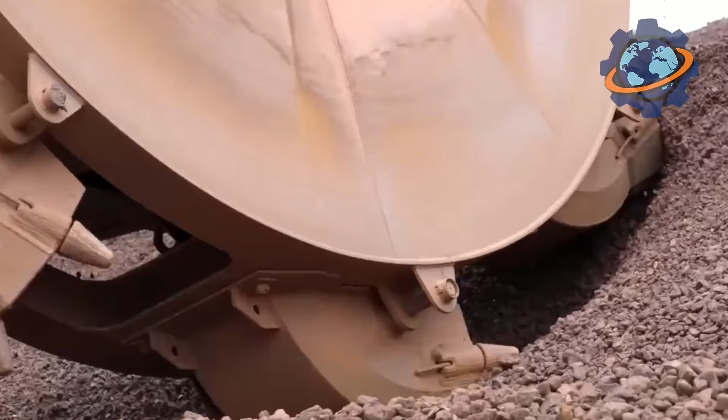Every year, humanity extracts over 2 billion tons of iron ore from Earth's crust. Picture this. More than half of our planet's entire weight is iron, most locked in the core, creating the magnetic field protecting all life. But here's what shocks engineers worldwide. We're standing on the most abundant metal in the universe, yet accessing it requires temperatures hotter than volcanic lava.

How does rust-colored rock transform into gleaming steel skyscrapers? How do ancient mountains become modern civilization? Stick around till the end. You'll discover why iron shaped human history more than gold ever did, and the jaw-dropping secret hiding inside every bridge, car, and building around you right now.

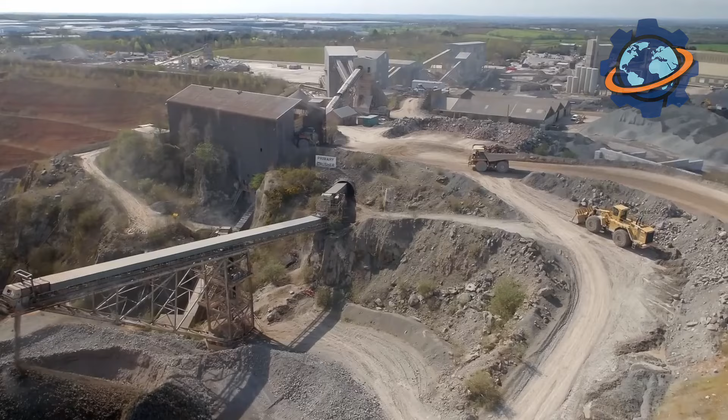The story begins in Western Australia's Pilbara region, where iron mountains stretch across landscapes older than dinosaurs. Massive excavators, standing 8 stories tall, picture buildings that walk, tear into rust-red cliffs with bucket teeth weighing 12 tons each. These mechanical giants rip through rock layers formed 3 billion years ago when Earth's oceans first rusted.

With thunderous crashes echoing across 4-mile-wide craters, each excavator loads haul trucks carrying 400 tons per trip. That's the weight of 80 elephants moving at 40 miles per hour on tires taller than basketball hoops. Processing 30 million tons annually from single mines, enough iron ore to build 12 Golden Gate bridges every single day.

Next comes crushing, where house-sized jaw crushers, imagine dinosaur mouths made of hardened steel, pulverize boulders into gravel-sized chunks. With deafening roars splitting eardrums even through protection, these crushers generate forces exceeding 20,000 pounds per square inch. Clouds of red dust billowing upward create artificial sunsets visible from space satellites.

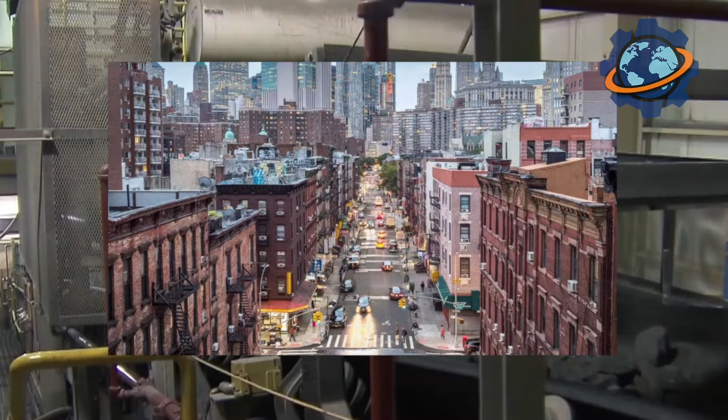Conveyor belts stretching 12 miles long, longer than Manhattan, transport crushed ore at 18 miles per hour. Workers riding inspection carts traverse distances requiring 25 minutes one way. That's enough belt to wrap around 300 football fields. Every hour, 50,000 tons flow through this system, weight equivalent to 5 Eiffel Towers moving continuously past checkpoints.

Giant grinding mills, standing 5 stories tall, with diameters matching Olympic swimming pool widths, pulverize rock into fine powder. Inside these rotating drums, 20-ton steel balls, each weighing more than shipping containers, tumble with ore, creating grinding thunder heard miles away. Operators monitor vibrations. Wrong frequencies mean catastrophic bearing failures, costing millions.

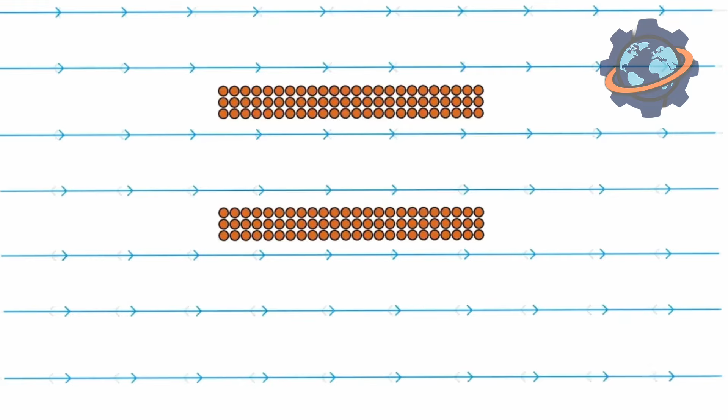At rotation speeds creating gravitational forces triple normal Earth gravity, particles shrink to powder finer than talcum. Processing 8,000 tons hourly, that's filling semi-truck after semi-truck every 30 seconds. This powder, called concentrate, contains 65% iron. Magnetic separators then extract iron particles using forces strong enough to levitate railroad spikes, leaving waste rock behind.

Next comes the blast furnace, a towering inferno standing 30 stories high, its steel shell glowing dull orange even from outside. At internal temperatures exceeding 3,000 degrees Fahrenheit, hot enough to vaporize aluminum instantly, iron ore transforms into liquid metal. Picture Dante's Inferno engineered with precision.

Measured charges of iron ore, coke, and limestone descend from the top, while superheated air blasts upward at 2,000 degrees from ring-shaped nozzles called tuyeres. This creates a raging chemical storm, where carbon monoxide rips oxygen from iron oxide molecules. The reaction releases enough heat to melt granite. Every 3 minutes, sensors check 20 different parameters. Without precision, furnaces explode with force demolishing city blocks.

The blast furnace operates continuously for 15 years, never cooling, never stopping, like Earth's core relocated to industrial facilities. Inside this chemical reactor, materials descend through distinct zones. Upper regions preheat incoming ore. Middle zones drive off moisture and carbon dioxide. Lower depths become hell itself, where iron liquefies.

At the hearth bottom, molten iron collects at 2,800 degrees Fahrenheit, dense as lead but flowing like water. Every 4 hours, workers drill through clay-plugged tap holes. Liquid iron erupts in blinding white rivers, flowing through ceramic channels into railroad cars holding 300 tons each. This step is critical because timing determines metal purity. Tap too early, slag contaminates. Too late, furnace pressure ruptures containment walls.

After tapping, slag, lighter impurities floating atop molten iron, gets diverted into separate channels. This glowing amber liquid, essentially liquefied rock, contains calcium, silicon, and aluminum oxides stripped from ore. Rather than waste, it becomes roadbed material and cement ingredient, recycled at 98% rates globally. The molten iron, called pig iron, contains 4% carbon, too brittle for construction. Picture glass that looks metallic. Drop pig iron from waist height, it shatters into fragments.

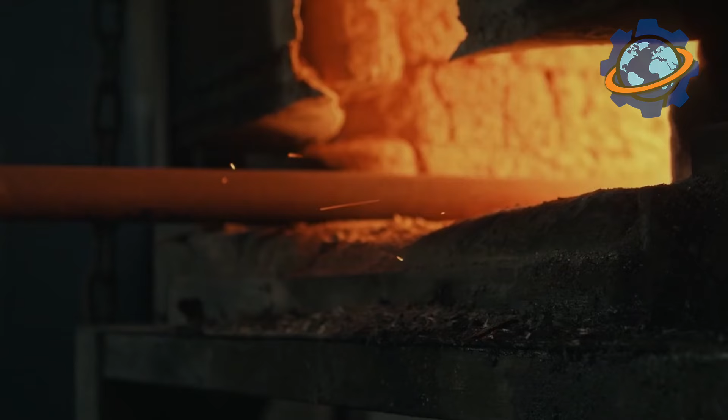Next comes the basic oxygen furnace, where pure oxygen blasted at supersonic speeds through 3-foot diameter lances burns away excess carbon in 17 minutes. Flames shooting 70 feet high, temperatures hitting 3,200 degrees, create hurricane-force winds inside steel vessels holding 350 tons of liquid metal.

Steelmaking requires precision rivaling brain surgery. Computer-controlled oxygen flow adjusts by milliseconds. Operators add exact amounts of manganese, silicon, chromium, elements changing steel properties dramatically. Too much carbon, steel cracks in winter cold. Too little, metal bends under load.

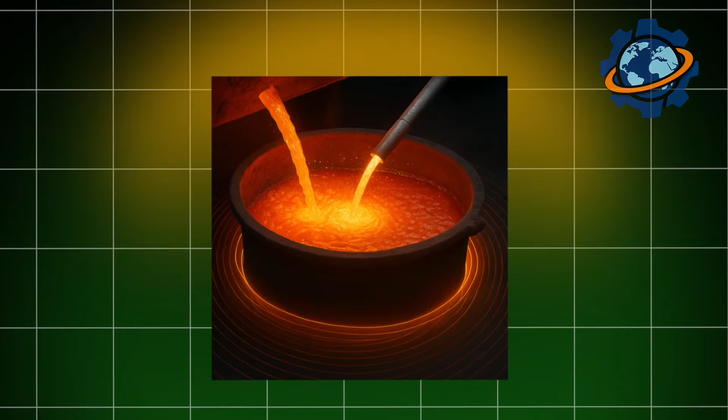Picture this: alloying elements get injected via submerged lances. Electromagnetic stirring, invisible but powerful, homogenizes composition. Samples extracted every 3 minutes get analyzed via spectrometers, determining chemistry within seconds. Modern furnaces achieve carbon content accuracy to 0.01%, the difference between a skyscraper standing or collapsing.

After refining, liquid steel flows into continuous casting machines producing slabs 30 feet long, weighing 25 tons, at rates of 1 slab every 90 seconds. This wasn't always so advanced. Back in ancient Anatolia around 1300 BC, Hittite metallurgists discovered heating iron ore with charcoal produced workable metal. That breakthrough, accidental furnace conditions reaching iron's melting point, changed human civilization forever. Iron tools outperformed bronze, enabling an agriculture revolution.

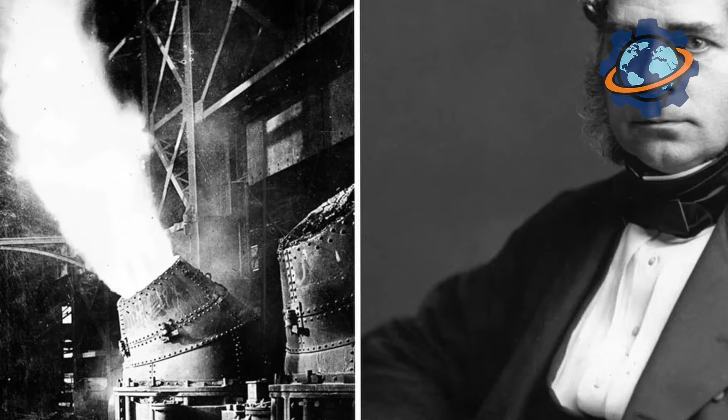The breakthrough came when British inventor Henry Bessemer patented his converter in 1856, slashing steel production time from 24 hours to 17 minutes. Suddenly, steel costs dropped 90%. This single invention built modern cities. Skyscrapers, bridges, railroads exploded across continents. Today, global steel production exceeds 1.9 billion tons annually. That's enough to build 75,000 Eiffel Towers yearly, or manufacture 43 million automobiles, or construct bridges connecting every coastline on Earth.

Carbon emissions drop by 62% when using recycled steel versus virgin ore, equivalent to removing 12 million cars annually. Industry saves over $80 billion yearly through scrap recycling. Processing costs drop 43% because melting scrap requires 1/3 the energy of blast furnaces. So here's the secret promised: every ton of steel you see, bridges, buildings, cars, will be recycled indefinitely. Unlike plastic decomposing into microparticles or paper pulping into mush, steel never degrades.

Magnetic separation extracts it perfectly from demolished structures. That girder in your office building might contain steel from 1930s locomotives. Your car's frame could include battleship armor from World War II. Nothing disappears. Metal merely transforms, reborn eternally. From ancient mountains to modern marvels, the cycle completes. Iron, humanity's most essential metal, circulates through civilization like blood through veins. We're not consuming Earth's iron, we're borrowing it, briefly, before passing it forward to futures we'll never see.

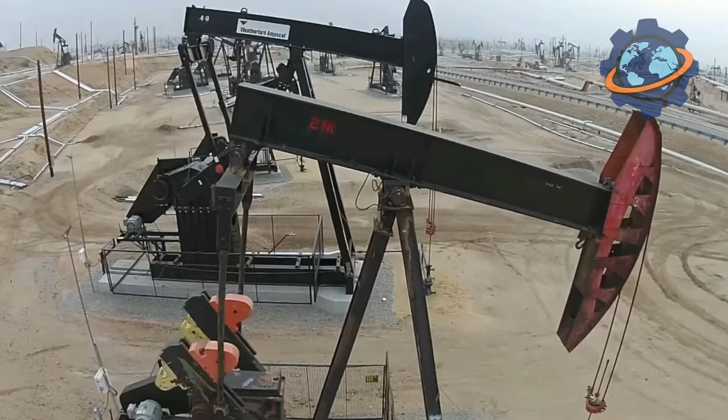The largest gasoline production plant in the United States is Marathon Petroleum's facility in Galveston Bay, Texas. It's a true giant, processing 631,000 barrels of crude oil every day. That's about 26.5 million gallons every single day, a staggering number. Let's dive into the atmosphere of oil refining production.

It all began long before the era of hybrids, electric cars, and climate summits. Back in the days when America was still smoking and roaring, the world needed fuel, and Texas provided it by the spoonful. On the coast of the Gulf of Mexico, in Texas City, a decision was made back in 1931 to build a plant that would refine oil into liquids that make cars and airplanes roar. By 1933, the plant was operational. At that time, it belonged to Republic Oil, and a little later, it was taken over by Amoco, which eventually became part of British Petroleum.

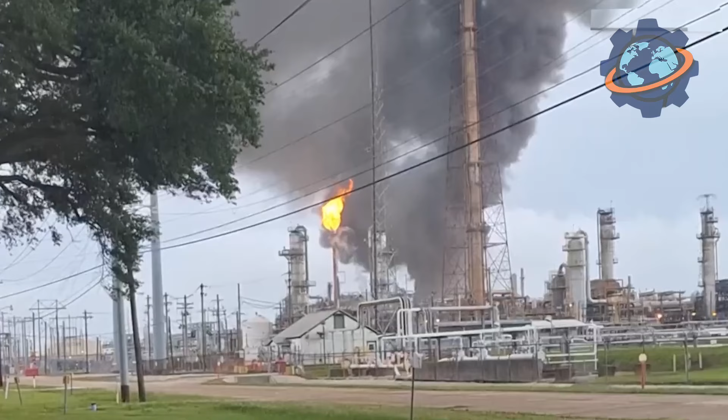And so, in 2013, the giant changes hands. Marathon Petroleum Corporation buys the plant. And they don't just buy it, they integrate it with their own refinery located nearby. Thus, a single gigantic system is born, the Galveston Bay Refinery, which since then has been processing over 630,000 barrels of crude oil every day. To imagine the scale, that's over 26 million gallons of fuel per day, and the complex covers nearly 1,000 acres. Over 1,500 people work there, not counting contractors and specialists who service the units.

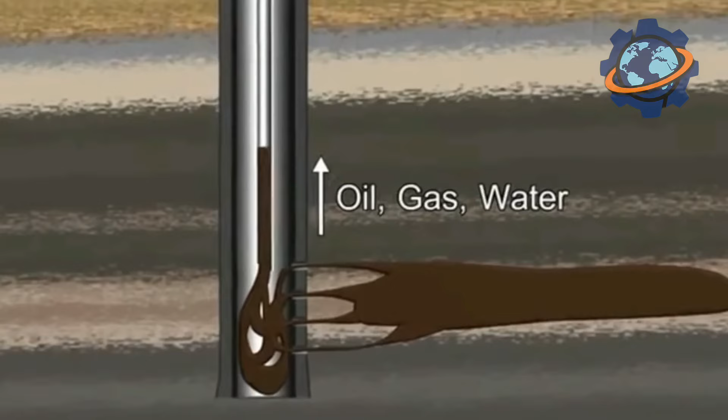It's like a small industrial city, only instead of coffee shops, there are reactors, instead of fountains, cooling towers, and instead of a park, thousands of pipelines. Galveston Bay is the pulse of the US fuel infrastructure. It operates 24 hours a day, 7 days a week, without stops or breaks. It's not just gasoline that's born here, they also produce jet fuel, diesel, fuel oil, petroleum coke, and even propylene for the chemical industry. Everything that can flow, burn, and work is squeezed out of every drop of crude oil.

Interestingly, the plant's location is strategic. The nearby port allows for receiving tankers from all over the world and a network of pipelines and railways for sending products all over America. Roughly speaking, if you're filling up your tank somewhere in the US, there's a chance that at least a drop of that fuel passed through the furnaces of Galveston Bay.

And although the world is changing today, and green energy is being talked about from every microphone, the Galveston Bay Refinery is not giving up its position. Marathon Petroleum is investing hundreds of millions of dollars in modernization, filtration, and reducing harmful emissions. Because as long as the planet is still roaring with engines, this Texas giant remains at the heart of the American highway.

We are heading to a territory where it doesn't smell of flowers, but where pipes roar, signal lights flash, and black gold is turned into gasoline. Galveston Bay Refinery, one of the largest plants in the US, and production there begins not with the push of a start button, but with thousands of miles of logistics, pressure, and thermal alchemy.

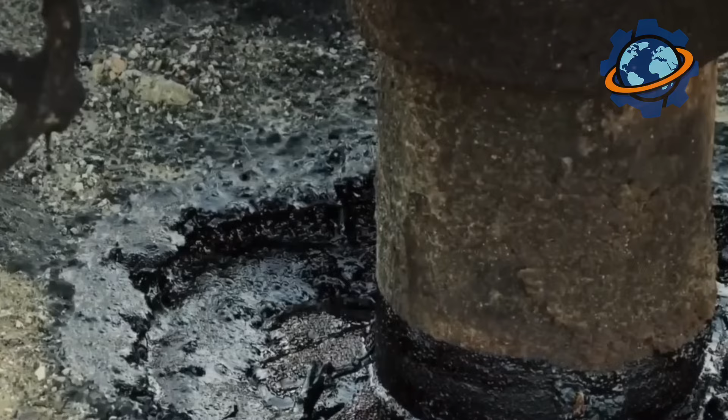The first drop of oil in this story doesn't yet have the smell of gasoline. It's in its raw form, viscous, dark, with impurities, water, sulfur, and metals. It's delivered by tankers through the port of Texas City, or pumped through pipelines that stretch for thousands of kilometers. This plant can receive over 1 million barrels of crude oil per day.

That's an insane amount. The oil goes into huge tanks, so-called crude tanks. Each such tank can hold 500,000 barrels. Imagine that, that's more than 20 million gallons. Here it is stored for several days, where it settles and is heated to a temperature of about 140 degrees Fahrenheit to reduce viscosity and facilitate pumping.

Next, the oil goes through desalters. These are special units that remove water, salts, and mechanical impurities. Because salts are death to metal reactors, they cause corrosion and form dangerous deposits. Here, the oil is mixed with fresh water and electrical energy, creating an emulsion that forces the impurities to separate. This is, essentially, industrial cleaning.

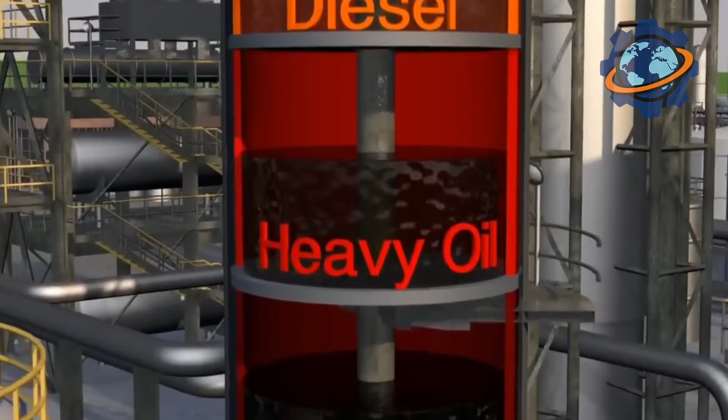After this, the main stage, the atmospheric distillation unit. A tower 230 feet high, where oil heated to 650 degrees Fahrenheit is fed in, and vapors rise to the top. And here the magic begins. Heavy fractions like diesel, kerosene, and fuel oil settle at the bottom, while lighter ones, the gasoline fraction, naphtha for petrochemicals, rise to the top. You can imagine this tower as an oil elevator, where each floor is a separate product.

The temperature in the column plays a key role. At each height, its own condensation point. Heavy components stop faster, light ones fly further. All this works in real time with control over every degree and every drop. But no, this isn't gasoline yet. What has been collected are raw fractions that are then sent to other units. Vacuum distillation, catalytic cracking, hydrotreating, and only then to blending. That is, mixing to meet the standards for gasoline, diesel, and jet fuel.

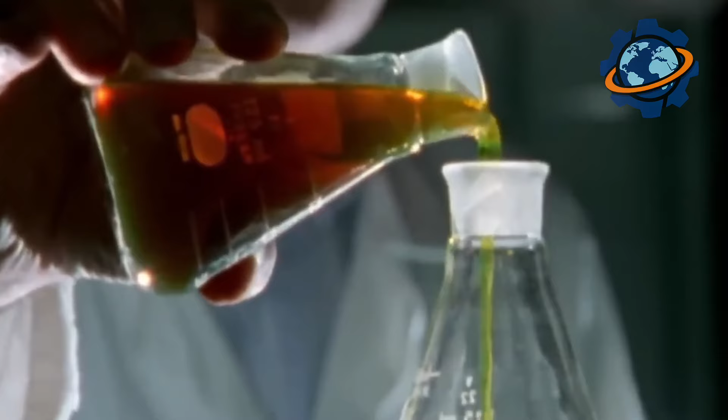By the way, gasoline itself is not a single component, but a mixture of dozens of fractions that are chemically and physically stitched together into a precisely calibrated formula, with an octane number, ignition temperature, volatility, aromatics, all according to standard. But let's go back. After the atmospheric tower, many heavy fractions are sent to a vacuum column, where they are distilled under reduced pressure, so as not to burn them to a crisp. From there come components for lubricants, bitumen, and even raw material for plastics.

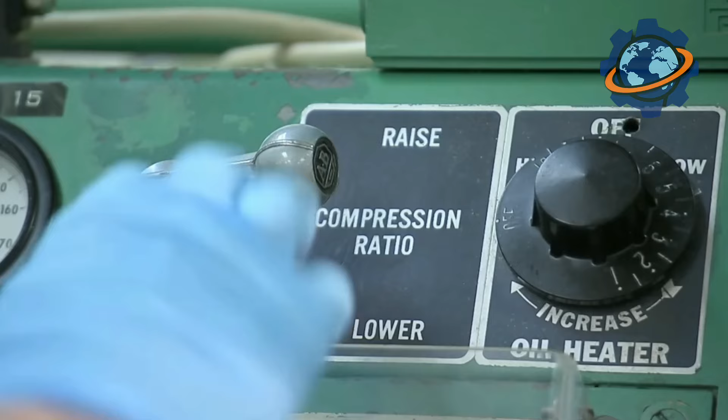Then even deeper, catalytic cracking, where molecules are literally broken into smaller ones, turning heavy fuel oil into light gasoline. And only when this black magic is complete does the collection of fractions, mixing, adding additives begin, and at the end, storage tanks with the finished product, which again await tankers, pipelines, and rail cars.

After all the formidable reactors, furnaces, and towers, where crude oil has been given a good heating, the crucial stage arrives: final blending. This is no longer a turbulent boiling or flowing in pipes. It's like a chemical kitchen, where a complex dish with a taste of power and precision is prepared from a few simple ingredients. Each fraction obtained from previous processes has its own properties.

One is light, volatile, with a low octane number. Another is heavier, dense, resistant to temperatures and pressure. From these, like from puzzle pieces, petrochemical technologists assemble the required mixture. This is called blending, and this is the moment when gasoline essentially is born. It is not mixed randomly.

Everything happens according to precisely calculated formulas. The fractions are fed into mixing tanks, where every drop is controlled by automation. Machines know exactly how much of what to supply to get the desired grade of gasoline at the output, with a certain octane number, resistance to detonation, and stability during storage.

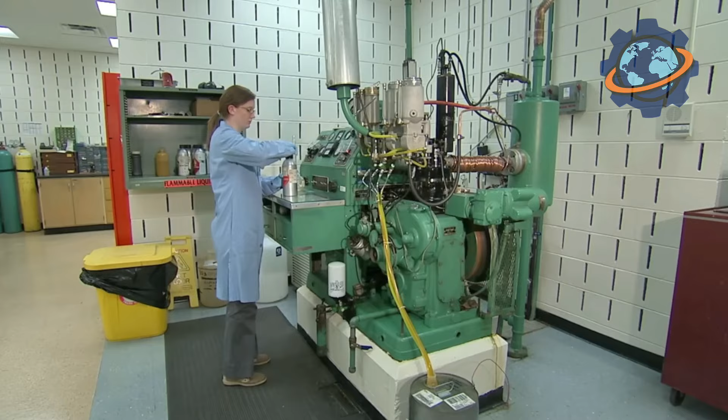But even the most precise mixing is not the end. Special additives are added to the gasoline composition. These are small in volume, but powerful in effect substances. It is they that help the fuel work better, not destroy engines, not rust in tanks, not evaporate too quickly, not clog injectors, not pollute the atmosphere. Additives are introduced in microscopic doses, literally a few ounces per gallon, but modern fuel is impossible without them.

When everything is ready, the gasoline goes into finishing tanks. These are giant steel containers located next to railway lines, truck ramps, and port pipelines. There, the fuel can be stored for days or weeks, waiting for its time. Then, shipment: tankers, rail cars, barges. And so, the fuel hits the road.

Maybe this very batch of gasoline will be hissing in the tank of your car in a few days. Maybe it will power a combine, a truck, a boat, or an airplane. But whatever the case, this gasoline has come a long way. From dark, raw mud to perfect, transparent fuel. It is clean, stable, ready to burn, but only when you say, "Start your engine."

Every year, over 3,000 tons of gold are mined worldwide. But you'll be surprised, a significant portion of this shiny treasure doesn't stay in mines or banks, but heads to a place where gold literally turns into art: Dubai. In a city that trades over $129 billion in gold annually, ingots become masterpieces that shine in the 300 shops of the legendary gold souk.

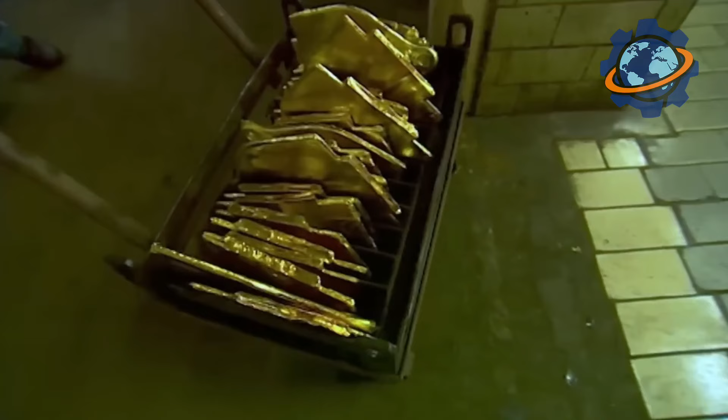What is really hidden behind the glitter of jewelry? Ancient rituals, or cutting-edge technology? If you watch until the end, you'll discover a golden secret that almost no one knows.

Our journey begins not in a luxury boutique, but in the bustling cargo terminal of Dubai's airport. It is here that tons of gold arrive from over 100 countries around the world, from distant mines in Africa, Australia, and America. These planes are not carrying passengers, but a precious cargo in the form of large, heavy ingots.

Part of them is so-called doré gold, unrefined, with impurities of other metals, straight from the mines. Another part consists of standard bank ingots, but they all have a long path of transformation ahead of them. Dubai is not a mining location. It's a giant, incredibly powerful melting pot and production center, the largest gold hub on the planet.

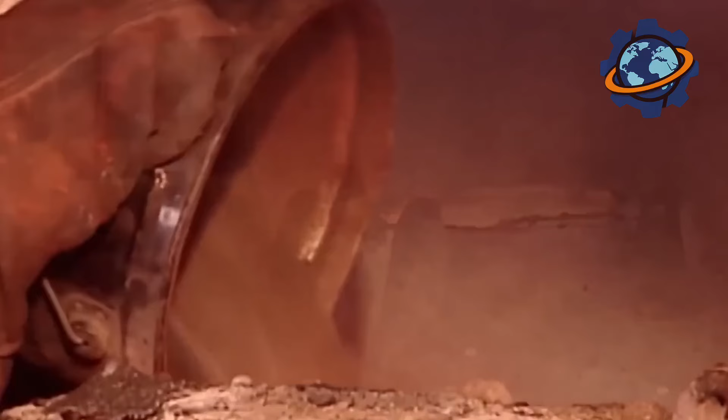The first stop for our gold is a refinery. This is a true high-tech fortress, better protected than a bank. Here, the sacred act of purification takes place. Ingots are loaded into giant induction furnaces. The air is filled with a hum and heat. The temperature inside exceeds 1,900 degrees Fahrenheit, and the solid metal turns into a liquid, dazzlingly bright sun. The liquid gold boils, and impurities float to the surface, which are carefully skimmed off.

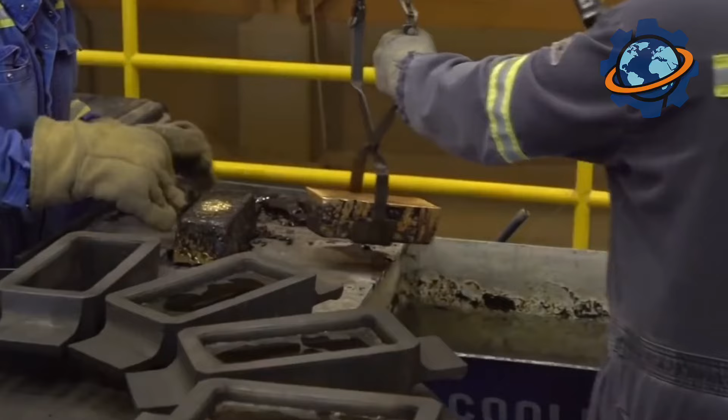But this is not enough to achieve perfect purity. Next, chemistry comes into play. The gold goes through complex electrolysis processes, such as the Miller and Wohlwill processes, where an electric current and chemical reactions are used to remove absolutely all foreign metals. The goal is to achieve a purity of 999.9, so-called 4 nines, the highest standard in the world. At the output, we get ingots of pure, almost otherworldly gold, shining with a deep, rich yellow color.

But surprisingly, jewelry is rarely made from such pure 24-karat gold. Why? Because it's too soft. A ring made of pure gold could be deformed by a simple handshake. And this is where true jewelry science begins. To make gold strong and give it different shades, it is alloyed with other metals. This process is called alloying.

Pure gold is melted again, and a strictly measured amount of ligature, an alloy of copper, silver, palladium, or zinc, is added to it. Do you want the classic yellow gold, so beloved in the East? Add a little silver and copper. Dreaming of romantic rose gold? Increase the share of copper. And for elegant white gold, palladium or nickel is needed.

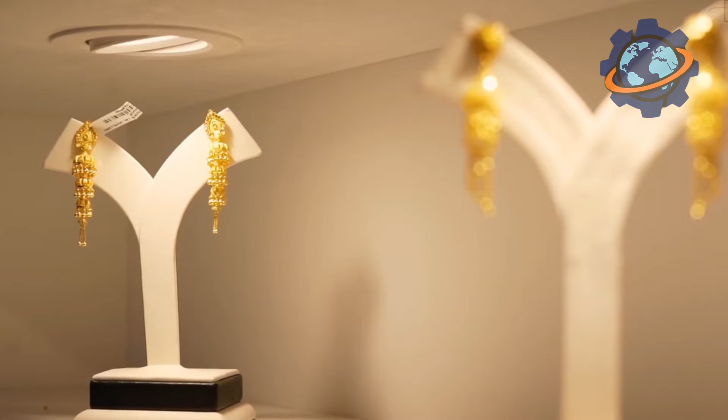This is how different purities, or karats, are born. In the Dubai market, the most popular are 22 karats, which is 91.6% pure gold, and 18 karats, that's 75% pure gold, which are the perfect compromise between purity and practicality.

Now that we have a gold alloy of the desired color and strength, the most interesting part begins, the creation of the jewelry itself. And here, Dubai demonstrates all its versatility, combining futuristic technologies with a craft that is thousands of years old. Many pieces begin their life on a computer screen.

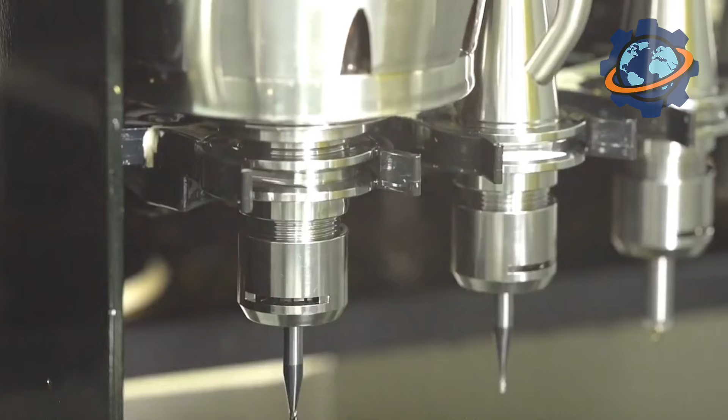Jewelry designers create complex three-dimensional models using CAD software. They can draw every detail, every swirl of a future necklace or earrings. Then this digital model is sent to a 3D printer, which, not from plastic, but from a special wax, grows a precise copy of the jewelry layer by layer. It's a wax wonder.

Next, this wax model, or wax pattern, becomes the basis for casting. It is dipped into a special plaster-like mixture that hardens, forming a mold. Then this mold is heated. The wax melts out, leaving behind a perfectly accurate hollow impression of the future jewelry. And here it is, the moment of truth.

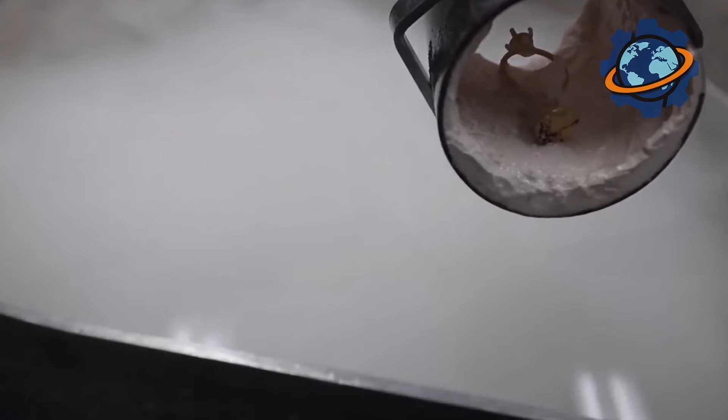Molten, red-hot gold is poured into this mold under pressure, or with the help of a vacuum. Every minute detail, reproduced with computer accuracy, is filled. When the metal solidifies, the plaster mold is broken, and a rough gold piece is born. But this is just a skeleton.

Now master jewelers, whose skills have been passed down from generation to generation, get to work. They grind, polish, assemble individual parts, turning metal into a work of art. Imagine these workshops filled with the buzzing of drills, the quiet tapping of hammers, and the focused faces of the masters.

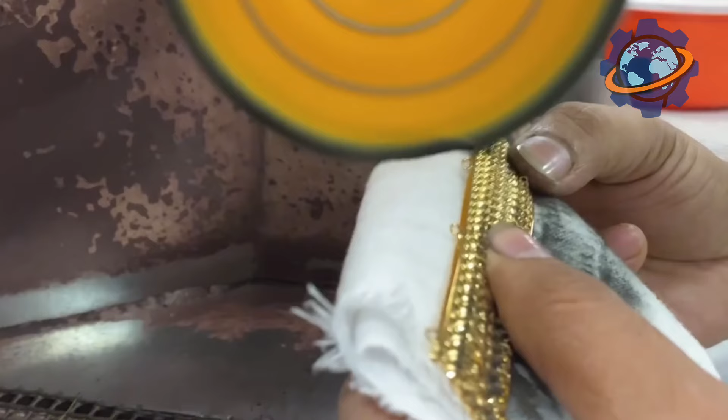They use techniques that haven't changed for centuries, creating the finest patterns from wire, inlaying pieces with precious stones, engraving complex Arabic ornaments. This is painstaking manual labor that requires incredible skill and patience. Each stone is set by hand, each link of a chain is checked for strength, and, of course, quality control.

The government of Dubai is extremely strict about the reputation of its main market. Every piece undergoes a mandatory check in the municipal laboratory. A special hallmark is stamped on it, confirming the carat. This is a guarantee of authenticity. You will never buy a fake in an official Dubai store. This strict control system has created the city's reputation as the most reliable place to buy gold in the world.

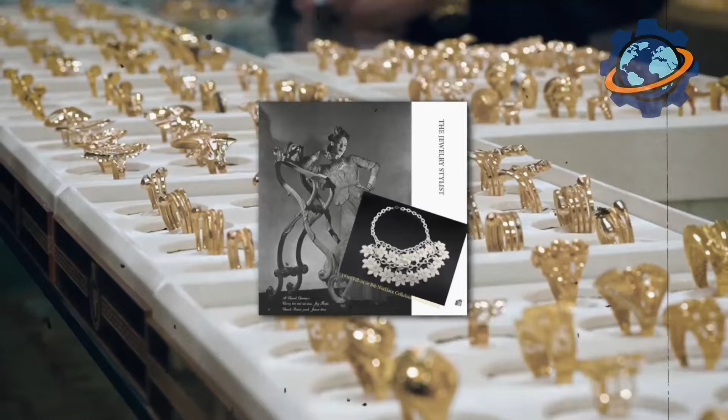And so, having gone through this long and complex path, a piece of gold jewelry ends up in the window of one of the more than 380 shops of the legendary gold souk in the Deira district. This is a place where history meets luxury. A market that started in the 1940s as a small group of merchants from India and Iran has turned into a global center of attraction for everyone who appreciates the beauty of gold.

Here you can see everything, from modest chains to giant wedding necklaces weighing several pounds, from classic Arabic designs to ultra-modern European styles. The air here is thick with the excitement of bargaining and the enthusiastic exclamations of tourists. This is not just a market, it's a show, an attraction, an open-air museum.

This is the journey of gold in Dubai. From a formless piece of metal, mined thousands of miles away, through the fire of furnaces and the hands of talented masters, to a dazzling masterpiece waiting for its owner in the world's capital of glitter. It's a process where modern technologies serve ancient art and strict control guarantees quality. And all this to maintain the loud and absolutely deserved title, City of Gold. Incredible, isn't it?

Dubai has firmly established itself as one of the leading global gold trading centers, ranking second in the world in 2023 by trade volume, surpassing the United Kingdom. The total value of gold trade in the UAE that year exceeded 129 billion US dollars, which is 36% more than in the previous year. This highlights the rapid growth and strategic importance of the emirate in the global precious metals industry.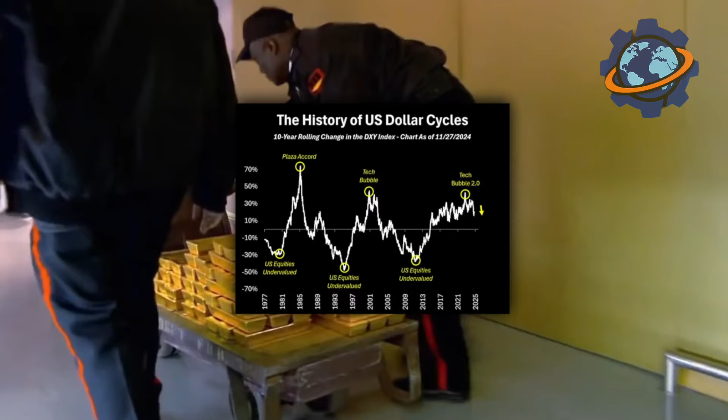The dynamics of the gold market in Dubai are influenced by global economic uncertainty, fluctuations in the US dollar exchange rate, to which the UAE dirham is pegged, and stable demand from investors and consumers. In times of instability, gold is traditionally seen as a safe haven asset for investment. Analysts predict further market growth.

The gold bullion market in the UAE is expected to grow at an average annual growth rate of almost 10% until 2031. This will be facilitated by a business-friendly regulatory environment, a developed logistics infrastructure, and the absence of value-added tax on gold. The UAE's entry into BRICS Plus in 2024 opens up new opportunities for expanding gold trade with other market giants.

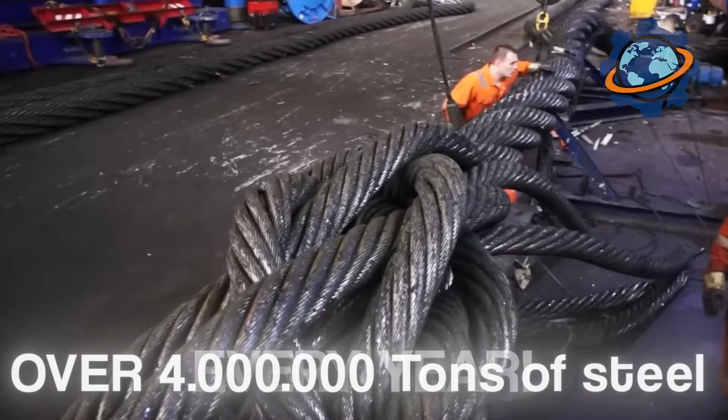Every year, over 4 million tons of steel wire rope are produced worldwide, and it's these thin, shining threads that hold up bridges, elevators, lifts, and ships. But what if I told you that before becoming a rope, every wire goes through real torture: acid, flame, a press, and a tension capable of tearing steel apart?

In this video, we'll show you how a piece of rough wire rod is born into a perfectly smooth metal thread, capable of withstanding thousands of tons of load. And at the end, you'll learn something that even the manufacturers themselves keep hidden.

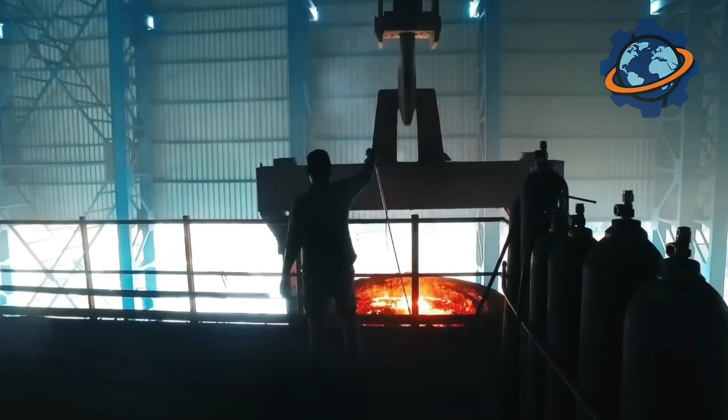To create a steel cable capable of holding up a bridge hundreds of feet long, it all starts with the right alloy. Most often, it's carbon steel with a carbon content of around 0.6%, which provides both strength and elasticity. Sometimes chromium, nickel, or molybdenum are added for corrosion resistance and increased load capacity, especially for cables that need to work outdoors for decades.

The metal is delivered to the factory in the form of huge steel slabs, plates measuring 10 by 2 by half a foot and weighing up to 10 tons. They are heated in furnaces to 2,200 degrees Fahrenheit until the steel becomes plastic, almost like rubber. Then these red-hot billets are passed through rolling mills, turning them into long, thin rods with a diameter of approximately 0.25 inches. These are called wire rods.

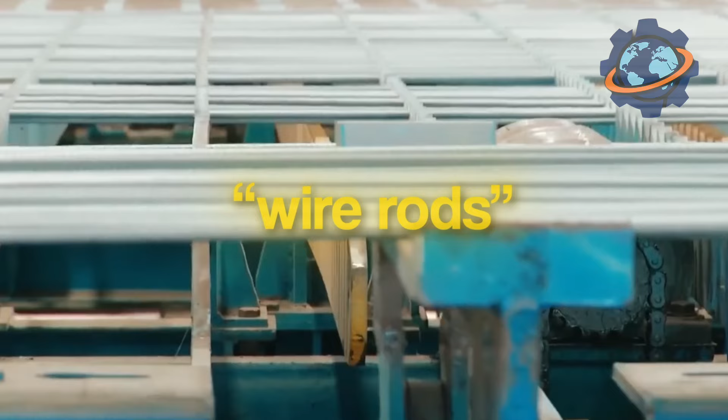These wire rods are then cooled under controlled conditions, either in air or in special baths, so that the metal structure is dense and the internal stress is uniform. Next, a short storage stage. The metal is weighed, checked for hardness, flexibility, and the presence of microcracks. Only after this is each coil sent to the main section, wire drawing, from which the future cables will be formed.

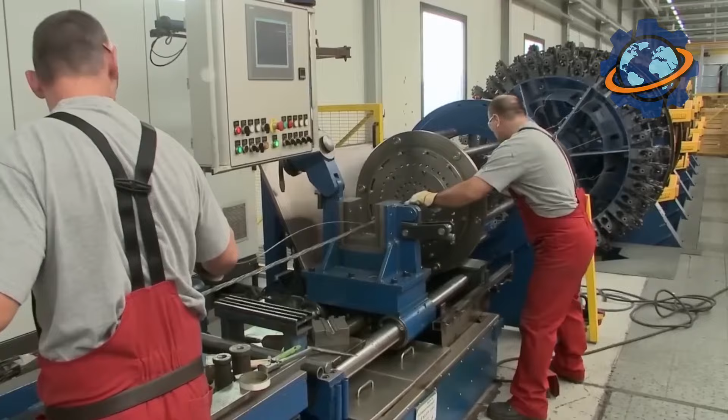After the steel wire rods have been cooled and checked for quality, they proceed to the wire drawing workshop. This process transforms the thick rods into thin but incredibly strong wire, which will become the foundation for bridge cables. Imagine a steel rod as thick as your finger, just off the billet. Its surface is rough, as if covered in a layer of sand or rust. This is scale, a hard and brittle crust that appears during hot rolling. To prevent it from interfering with further metal processing, it needs to be removed.

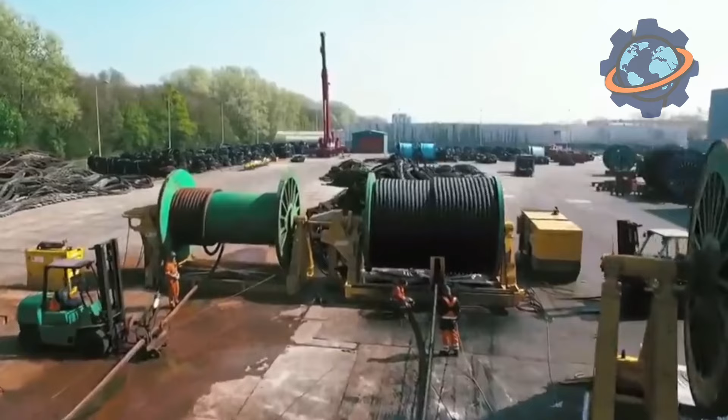To do this, the wire rod is first lowered into a bath of acid solution, usually sulfuric or hydrochloric acid. In this solution, the scale seems to flake off the metal, just like old paint peels off after being treated with solvent. Then the wire is rinsed with a large amount of water under pressure to wash away all traces of acid and dirt. To the touch after this, the metal becomes smooth and cool, like a freshly polished stone.

But that's not enough. Next, the wire goes through degreasing. It's submerged in special alkaline solutions that remove any oils that might have gotten onto the surface. And only then is the clean, smooth wire, shiny and dry, ready for the next stage: drawing.

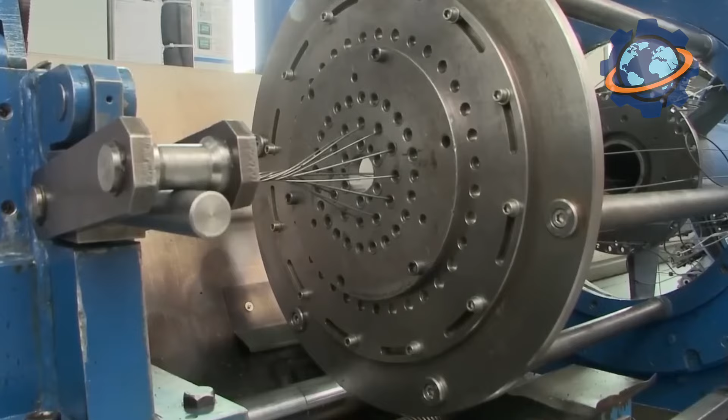Now the wire needs to be pulled through a hole smaller than the wire itself to stretch it out and make it thinner. But a thick end simply won't fit through. So, it's first sharpened. This process is called pointing. The wire is fixed in a special mechanism that resembles strong metal vice jaws. One end of it is inserted into a device similar to a small press or crusher, where the steel casing is gradually squeezed and stretched into a cone shape.

This way, the wire is essentially machined into a pointed tip. Imagine a pencil sharpened at one end, only it's not graphite but cold, shiny metal. This sharpened end then easily fits into the first opening of the drawing machine, a small metal die. To the touch, such a sharpened part becomes thin, like a shoelace, but remains elastic and strong. This is where the drawing process begins, which will turn the rough wire rod into a thin steel wire for the cable.

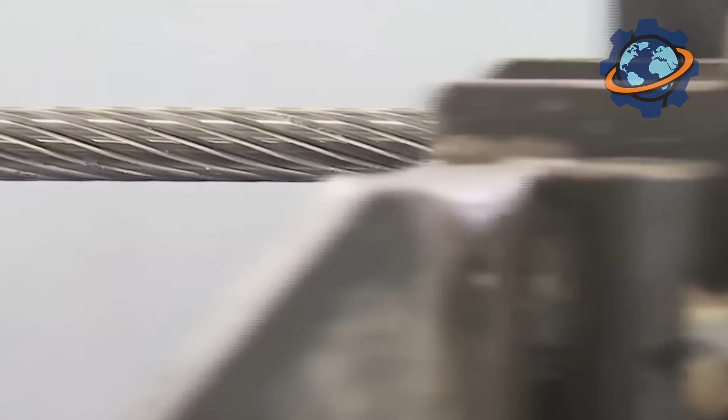Picture a shining metal strand, about the thickness of a pencil, being gradually pulled through a series of metal rings. Each of these rings is a drawing die, looking like a coin with a hole in the middle, but made of super hard material, like tungsten carbide. The holes in each die are slightly smaller than the previous ones. The whole system is arranged in a line, like beads on a thread.

The wire passes through the first ring, and it compresses it, stretches it, reducing its diameter. Next, the following ring, even smaller, and the same thing happens again. The entire wire is pulled by a powerful drawing machine, resembling giant toothed rollers or high traction rollers. It constantly pulls the wire forward, maintaining tension, and thus forcing it to pass through the dies.

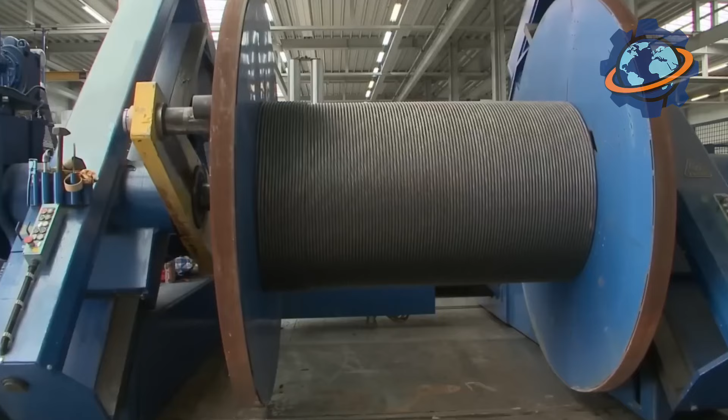To the touch, after several passes, the wire becomes thinner and longer, like a silvery strand of hair. The surface is smooth, cool, with a clear metallic sheen. Importantly, this entire process happens without heating. The metal remains cold. That's why it's called cold drawing. The steel gets stronger in the process. Its structure becomes denser and more durable, like a muscle that's been trained. And so, ring after ring, an ordinary wire rod transforms into a high-precision wire for a future steel cable.

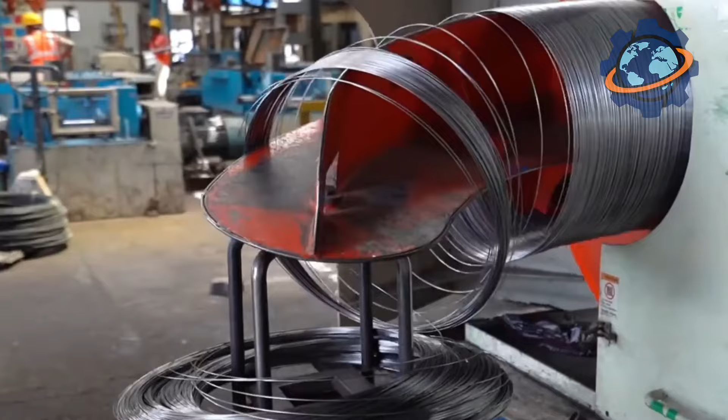The steel thread that has just passed through a series of drawing dies has become thinner and stronger, but at the same time stressed, like a stretched string with fatigue hidden inside. The metal has accumulated internal stresses, microscopic defects that reduce its ability to bend or stretch further without cracking. Yes, this wire has become brittle. To release this stress, the wire passes through a special thermal furnace.

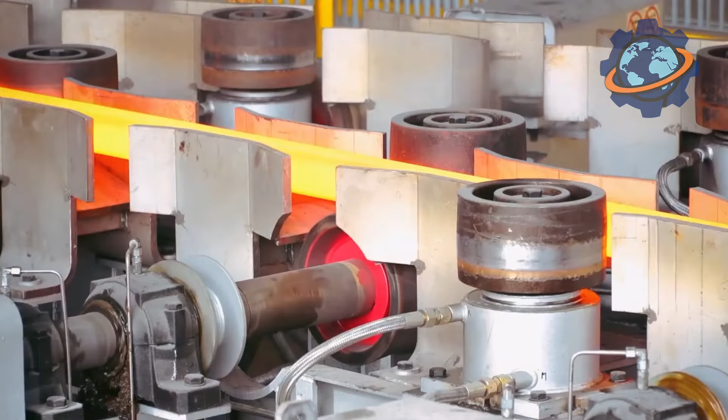It's not visible from the outside. It's a long metal tunnel structure, inside which the temperature reaches over 1000 degrees Fahrenheit. In such heat, resembling the middle of a bonfire, the wire slowly moves through the furnace, either lying on moving rollers or suspended. It gradually heats up to the required temperature and then slowly cools down. The whole process takes anywhere from a few minutes to an hour, depending on the thickness and grade of the steel. To the touch, the wire after this stage is just as smooth and shiny, but it no longer breaks.

Inside the metal, its crystalline structure has rearranged itself. The stresses are relieved, plasticity is restored. Now it's ready for the next series of drawings, and it will become even thinner, stronger, and more durable. It's like giving your muscles time to recover before the next workout.

In the final stage, the wire undergoes a final quality control, and this is definitely not a simple visual check. A long, almost continuous strand of shiny metal moves at a speed of tens of feet per second through the inspection unit. There, it's met by special sensors. This could be laser equipment that non-contact measures the wire's diameter with an accuracy of thousandths of an inch. Nearby, devices that determine strength.

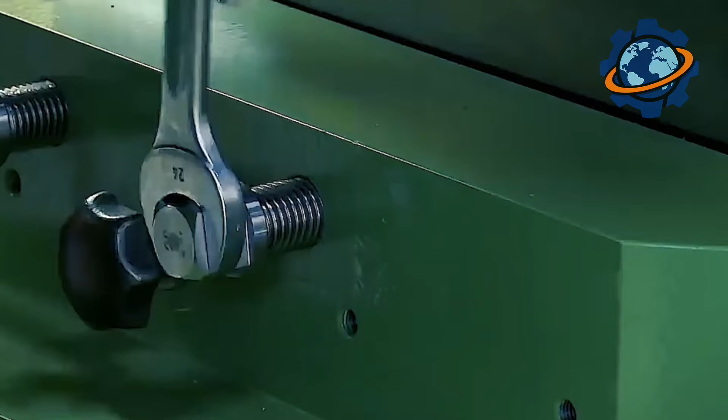A portion of the batch is selected for mechanical testing. The wire is clamped in hydraulic jaws and pulled until it breaks. This determines its tensile strength and breaking load. If the wire holds up, it's ready for work at heights of hundreds of feet, supporting the weight of a car bridge. The surface is checked separately for micro cracks, burrs, corrosion. High-resolution cameras or even eddy current testing are used here, which can see beneath the top layer of metal.

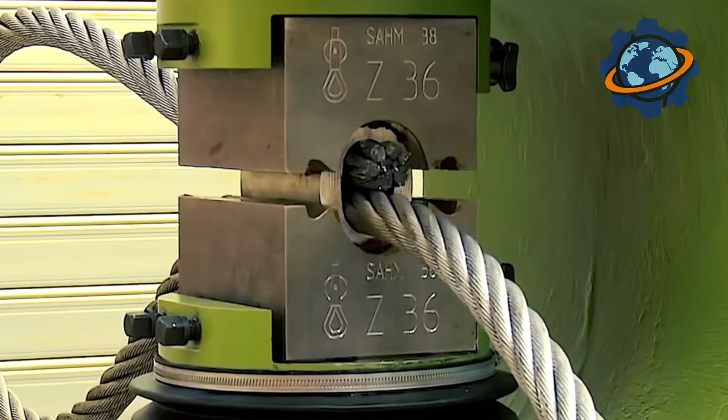And only the wire that has passed all these tests gets the green light. It will become part of a steel cable capable of withstanding years of loads and harsh weather. This is the final touch that guarantees what arrives at the construction site is reliable, like steel itself.

After inspection, the quality wire is neatly wound onto large spools. The wire passes through guide rollers and tensioning mechanisms that ensure the coils lie tightly, but not too tightly. All this happens on high-speed winding machines. Spools come in different sizes. For thin wire, they might weigh hundreds of pounds. For thicker wire, a ton or more.

Then these spools head to the next stage, the actual twisting into cables. But even before this, they are sometimes coated with an anti-corrosive compound or lubricant so the wire isn't damaged during storage and transport.

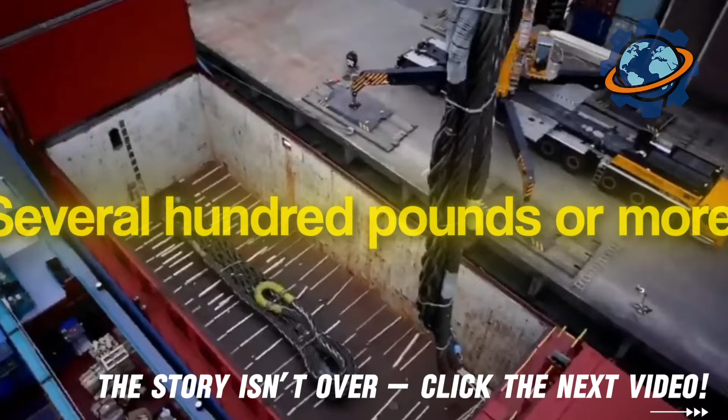Spools of wire are usually moved using forklifts, cranes, or special carts because the weight of even one spool can reach several hundred pounds or more. Manual labor is out of the question here. Otherwise, the risk of injury would be too high.

Every year, thousands of tons of fiberglass rebar are produced worldwide, a material that's throwing down the gauntlet to steel. Imagine hundreds of spools of fiberglass, thinner than a human hair, merging into a single river, passing through sticky resin baths, red-hot dies, and scorching ovens to be born as a rod that's 4 times lighter than steel, twice as strong, and completely immune to rust. This rebar is capable of doubling the lifespan of concrete structures and changing cities forever.

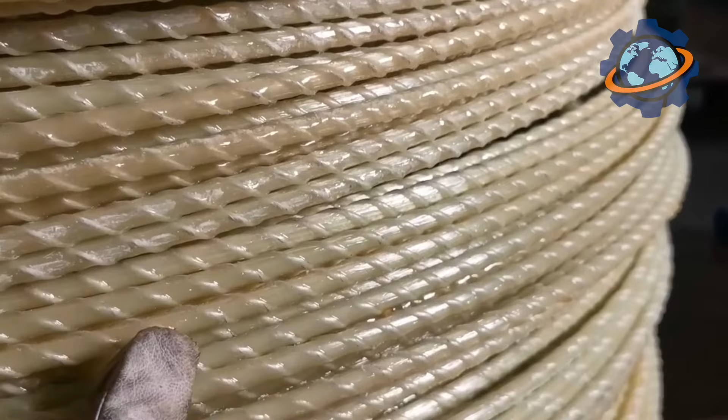But the most interesting part is hidden in the very heart of this process. If you watch until the end, you'll discover a secret that will completely change your understanding of the future of construction.

It all begins at one end of a massive workshop, where a structure resembling a giant library for threads stands. This is called a creel. On a wall several yards high, hundreds, and sometimes even thousands, of huge bobbins are installed in neat rows. On each of them is wound the finest glass thread, or roving. This isn't the kind of glass that windows are made of.

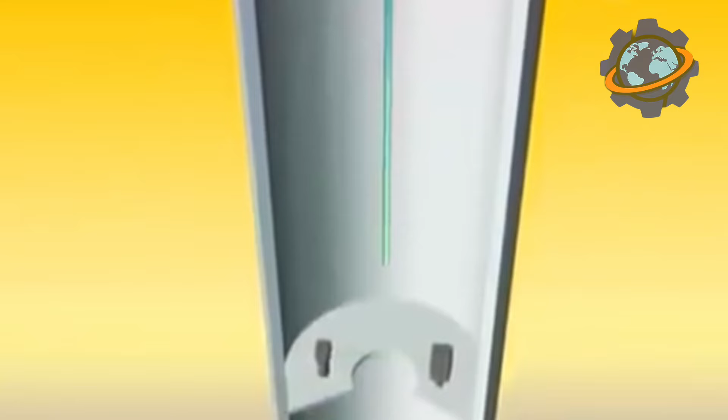This is a special fiberglass, produced by melting glass and drawing it through microscopic holes. The result is threads thinner than a human hair, but with incredible tensile strength. These will be our skeleton, our internal army that will give the rod its insane strength. From each of these hundreds of spools, its own separate thread is drawn, and they all come together into one thick, fluffy strand. It's like thousands of small streams merging into one large river. This dry, white strand is the soul of the future rebar.

Next, this river of fiberglass begins its journey. It passes through a system of guides and tensioning devices. This is a very important, though inconspicuous, stage. Every one of the thousands of threads must be tensioned with the same force. If one thread sags, while another is too tight, the load in the final product will be distributed unevenly, and it will lose its strength. Therefore, the machine carefully aligns them, preparing them for the most important moment: a baptism in resin.

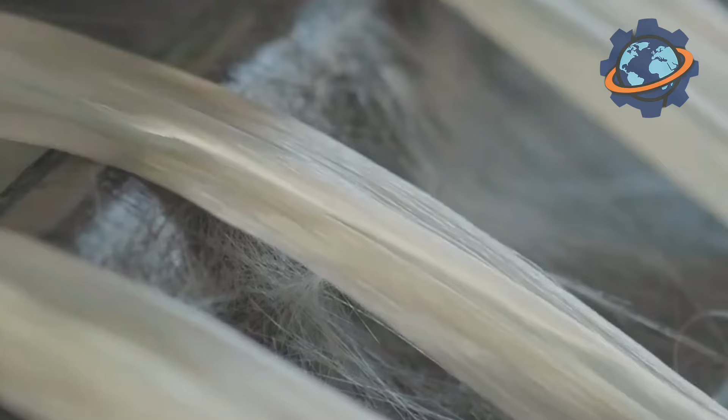The dry glass strand is slowly submerged into a bath filled with a thick, sticky liquid, similar to honey or syrup. This is a polymer resin, our meat that will grow on the glass skeleton. It's a complex chemical cocktail. The base is usually a polyester, vinyl ester, or epoxy resin. A hardener is added to it, a catalyst that will trigger a chemical reaction and force the liquid to turn into a solid plastic.

Various additives can also be added here. Pigments to add color, ultraviolet inhibitors so the rebar isn't afraid of sunlight, and flame retardants for fire resistance. The task of this bath is to saturate every single, even the tiniest fiber. The strand must be completely submerged in this resin so that no dry spots remain.

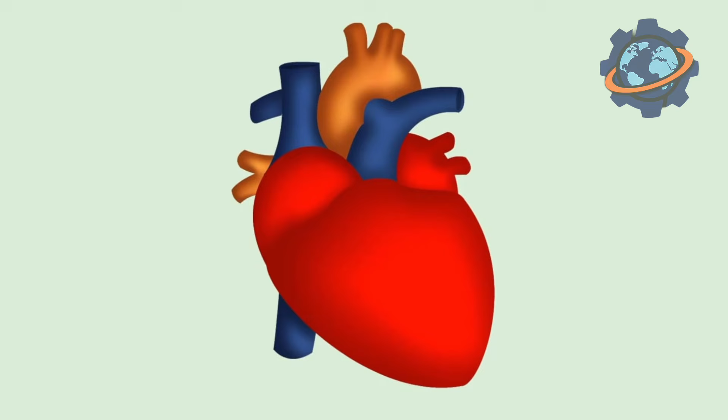The saturated strand, heavy with sticky resin, exits the bath and heads to its point of birth, the forming die. This is the heart of the whole process. Imagine a thick steel plate with a perfectly round polished hole, the diameter of which exactly matches the diameter of the future rod. The die is heated to a certain temperature. When the wet strand is pulled into this hole, several things happen at once. First, the die, like a press, squeezes out all the excess resin, leaving only the necessary amount.

Second, it tightly compresses all the fiberglass strands together, forming a perfectly round rod. Third, the heat from the die initiates the initial stage of the chemical hardening reaction, or polymerization. The resin begins to transform from a liquid into a gel. At the exit of the die, we can already see the familiar shape of the rod, but it is still soft and vulnerable. But how does it get its famous ribbed surface to hold well in concrete?

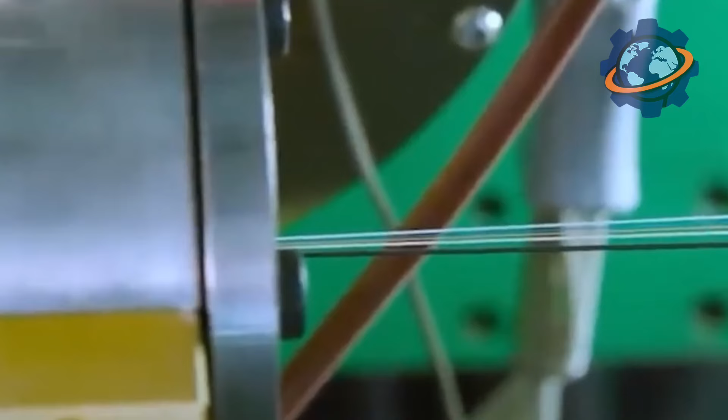Immediately after exiting the die, while the rod is still hot and soft, a special strand of the same fiberglass is wound around it. A thin, resin-saturated thread is wound in a spiral on the surface of the rod, creating a relief pattern. Sometimes, for even better adhesion, fine quartz sand is sprinkled onto the sticky surface, which adheres permanently to the resin. Now, our rebar has not only strength, but also teeth with which it will hold onto the concrete.

The formed and wrapped rod enters the longest part of the machine, the curing tunnel, or polymerization oven. This is a long chamber that can extend for tens of feet, inside which a high temperature is maintained, usually 400 degrees Fahrenheit. Here, the final transformation takes place. This is not just drying.

Under the influence of heat, the resin molecules begin to actively bond with each other, forming a strong, rigid three-dimensional network. The liquid, sticky syrup turns into an extremely strong and hard composite material that permanently binds millions of glass fibers into a single monolith. It's like baking a pie. As the rod slowly moves through this hot tunnel, it acquires its final, rock-solid hardness.

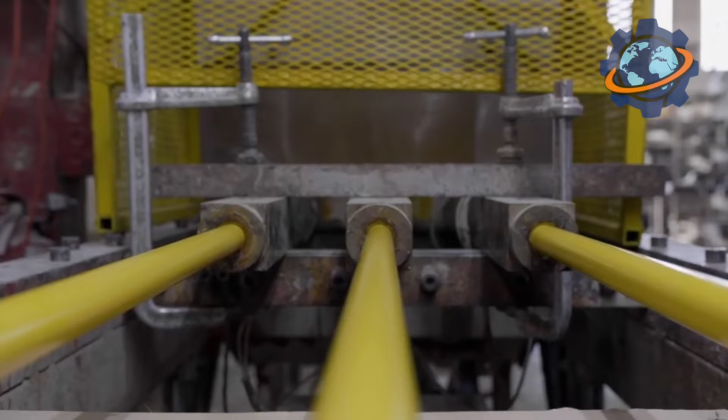But what pulls it through this entire long journey, from the spools to the oven? At the end of the line stands a special pulling device, which gives the whole process its name. Usually, it's two caterpillar-like mechanisms, similar to tank tracks, located one above the other. They gently but very firmly clamp the already finished hard rod with their rubber pads and pull it towards themselves at a constant, precisely calibrated speed.

It is they that create the force that pulls the fiberglass through the resin bath, through the forming die, and through the oven. The speed of this movement is one of the most important parameters that controls the quality of the final product. And so, from the other end of this long conveyor, an endless, perfectly straight, hard and hot fiberglass rod emerges.

The final chord is cutting. An automatic saw is installed across the line. It synchronizes with the speed of the rod's movement, at the right moment makes a quick forward motion, and with a sharp zzzt, cuts a piece of standard length, for example 20 or 40 feet, from the endless ribbon. Then it returns to its starting position, waiting for the next section to arrive.

The finished, still warm rods roll onto a cooling table, and then they are collected into bundles, tied, and sent to the warehouse. And just like that, before our eyes, thousands of fragile glass threads and a barrel of sticky liquid, having passed through baths, presses, and ovens, have turned into a lightweight but incredibly strong building material of the future, ready to challenge rust and time in the concrete jungle.

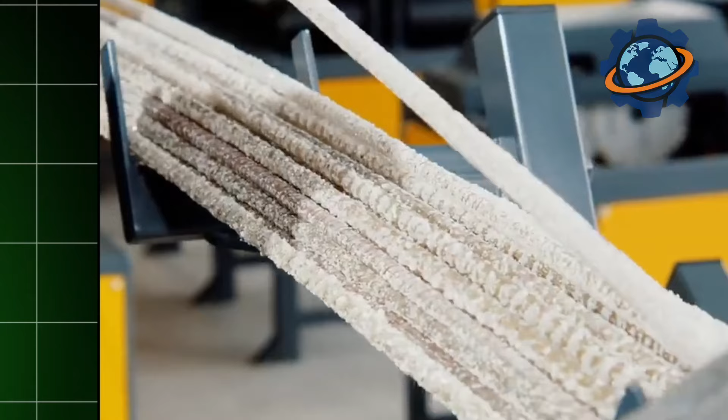The fiberglass rebar market is not yet a giant like the steel market, but it's the coolest and most audacious newcomer at the party, rapidly gaining popularity. The global market for this material is already valued at hundreds of millions of dollars, and the forecasts are just insane. It's expected to grow by 10 or 12% annually. This means that more and more engineers and architects are looking at rusting steel and saying, "Dude, we can do better." And now for the main features that make steel rebar nervously smoke in the corner.

The first and most obvious is weight. Fiberglass rebar is about 4 times lighter than steel of the same diameter. Sound boring? Now imagine this in real life. Imagine a truck carrying rebar to a construction site. It can bring 4 times more length of fiberglass rebar in one trip than steel, because it's limited by weight. Or for the same amount, it will take 4 times fewer trips, which saves fuel and time. On the site itself, 2 workers can easily carry whole coils or bundles of fiberglass rods, whereas moving steel requires a crane. This is a colossal saving in logistics and labor.

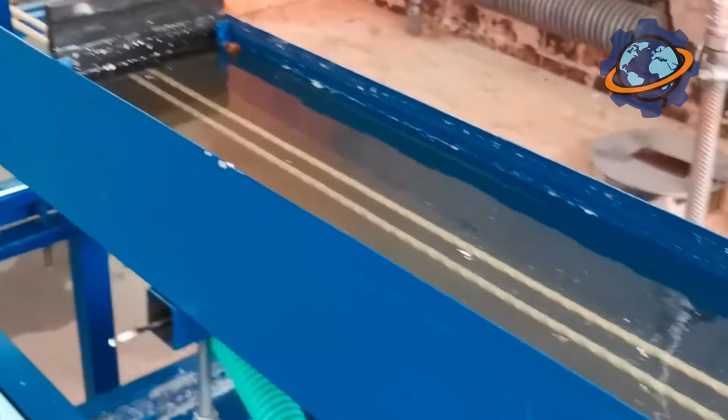Second is strength. And here, fiberglass just steps into the ring and knocks out steel in the first round. Its tensile strength is about twice as high as that of standard steel rebar. So you understand, to break a fiberglass rod, you need to apply twice as much effort as for a steel one of the same diameter. This means that in some structures, rebar of a smaller diameter can be used, saving even more weight and volume. It's like comparing a regular rope with a climbing rope. At a smaller thickness, it can withstand much greater loads.

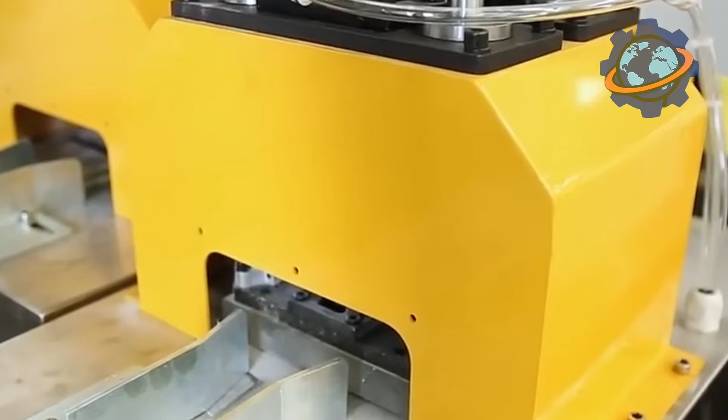But the main trump card, the real superpower of fiberglass, is its war against rust. The main enemy of any reinforced concrete structure, from bridges to parking garages, is not the load. It's rust. Water and salts penetrate through micro cracks in the concrete, reach the steel rebar, and it begins to rust. The rust expands in volume and literally tears the concrete apart from the inside. Annually, the US spends billions of dollars on repairing bridges, parking garages, embankments, and tunnels destroyed by rebar corrosion.

And fiberglass? It just laughs in the face of rust. It is chemically inert. It is completely indifferent to water, salt, acids, and alkalis. This means that the service life of the structure increases dramatically. A concrete structure reinforced with steel is designed for more than 50 years, and a structure with fiberglass rebar is easily designed for more than 100 years.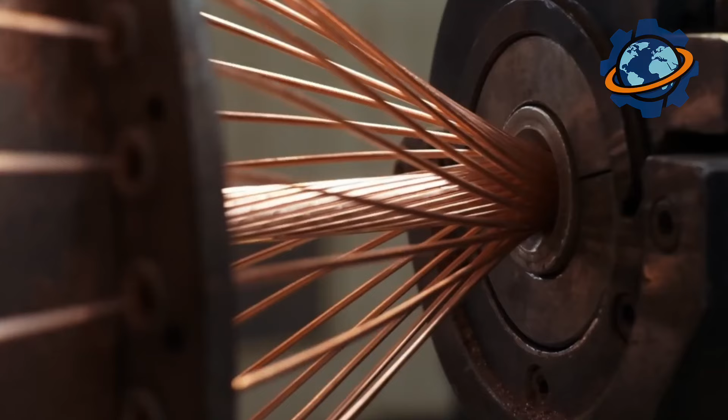What is this magic? How does ordinary sand turn into transparent threads, thinner than a hair, but stronger than steel? Watch closely. At the end of this video, you'll learn a secret you've never heard before.

Imagine this. In every pound of raw material, no more than a few millionths of an ounce of impurities. And this is critical, because even 1 billionth of an inch of foreign metal or organic matter can cause light scattering or absorption in the fiber optic cable. And then the signal, which was supposed to travel 60 miles without amplification, simply disappears.

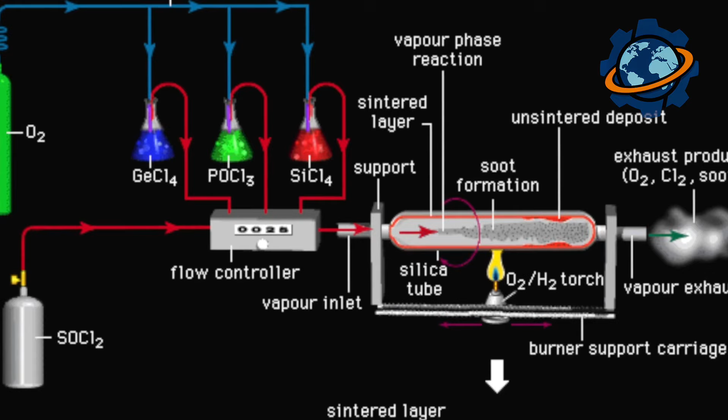Raw material for fiber optic cable isn't just washed or filtered, it's purified at the molecular level. Manufacturers often use vapor phase chemistry. Quartz sand is converted into gaseous silicon tetrachloride, which is then distilled, filtered, and deposited as pure vapor. And only then is it converted back into glass.

Add to this strict control of temperature, humidity, and air currents in clean rooms, and you'll get an idea of how far this is from an ordinary sandy beach. Production laboratories look more like NASA sterile zones than a glass workshop, and all for the sake of ensuring there's not a single defect in every yard of the future fiber. Because when you're transmitting light over thousands of miles, even one microscratch can cost you signal quality.

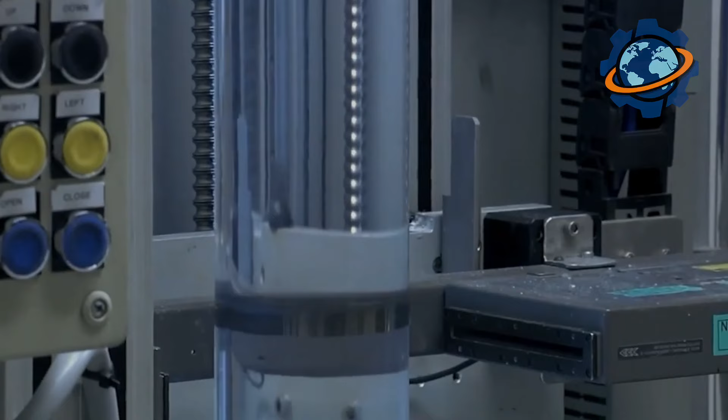A large, transparent glass cylinder that will later be melted and drawn into a very thin thread. This is the fiber optic preform. This huge glass rod is made using a method called vapor deposition. In a large furnace, air is mixed with very pure gases. These are different substances that turn into vapor when heated.

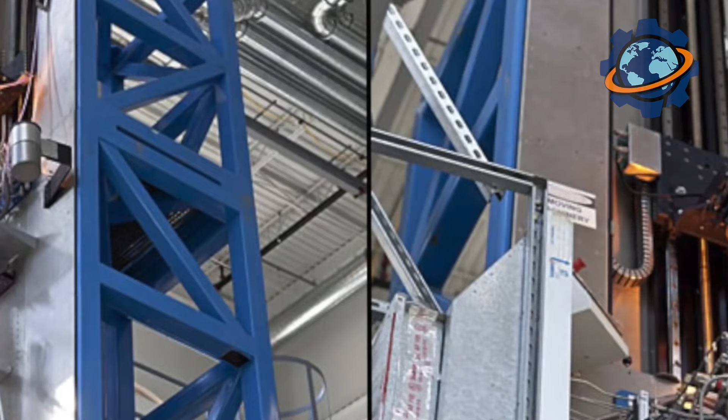These vapors hit the inner surface of a transparent tube, which is heated very intensely. When the vapors touch the hot wall of the tube, they deposit and turn into tiny droplets of glass, like dew collecting on leaves in the morning. Gradually, these droplets collect, layer by layer, until a thick layer of glass forms inside the tube. Then this tube is heated even more intensely, and it collapses into a dense solid rod, and this is our preform.

The preform is placed in a special furnace that heats up very intensely. The temperature inside it reaches approximately 4,700 degrees Fahrenheit. This temperature is so high that the glass becomes soft and starts to melt, like caramel on a stove. When the end of the preform melts, a drop of molten glass begins to drip from it. This drop is very carefully drawn downwards, and a thin thread is formed from it.

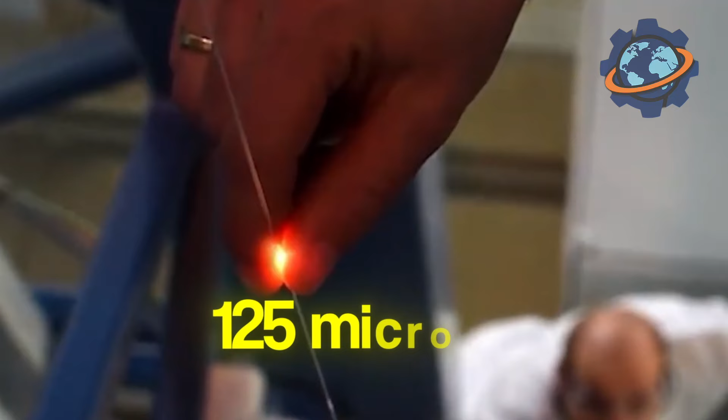This thread, the optical fiber, is drawn at a speed of approximately 1,000 feet per minute. Imagine that. It's faster than a cyclist moving through the city. It's important for the thread to be of uniform thickness throughout its length. The thickness of an optical fiber is usually around 125 microns, or approximately 0.005 inches. That's very, very thin. For comparison, the average human hair is about 100 microns thick or less.

To keep this diameter under control, special instruments are used during the process. They look at the thread in real time and measure its thickness. If the thread starts to become thicker or thinner, the system automatically changes the drawing speed or the furnace temperature to correct it.

After the optical fiber has been drawn from the preform and has become a thin, transparent thread, it needs to be protected. The fiber is very thin and fragile. If left unprotected, it can easily break, cracks will appear, or dirt will get on it. Therefore, immediately after drawing, the fiber is coated with a special protective layer.

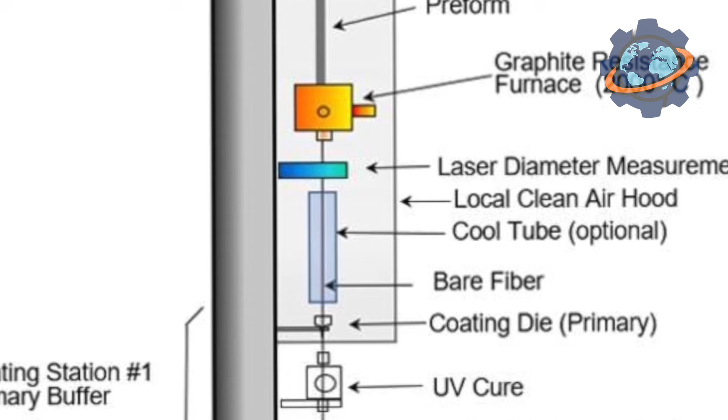A thin thread is pulled from the furnace. After the furnace, the thread immediately goes into a coating machine. This is a special device that clothes the thread in a plastic sheath.

The optical fiber enters a special part of the machine called the coating die. It's like a small tube, or nozzle, inside which there's molten protective material. As the fiber passes through this tube, a layer of liquid polymer is evenly applied to it. The polymer has very low viscosity, so that the coating is thin and even, but dense enough to protect the fiber. This coating layer usually consists of two parts.

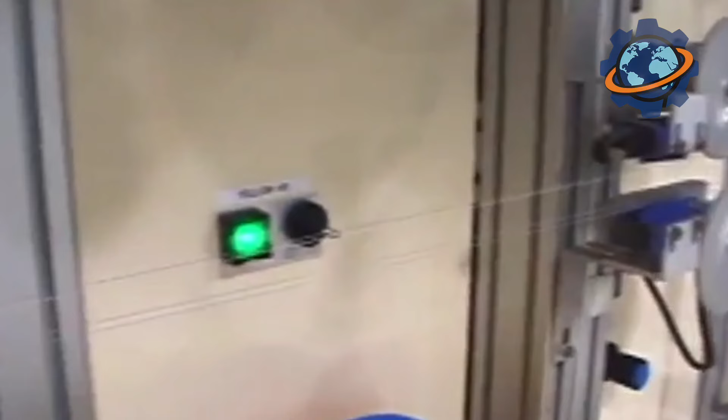The primary coating is a very soft, elastic layer that dampens mechanical shocks and allows the fiber to bend. The secondary coating is harder and more rigid, protecting against external influences, dust, and scratches. These two layers are applied sequentially, one after the other, to provide reliable protection.

After applying the liquid coating, the coated fiber passes through special forming rollers. They regulate the thickness and evenness of the layer, pressing the coating uniformly along the entire length of the fiber. These rollers are very precisely calibrated so that the layer is not too thick or thin.

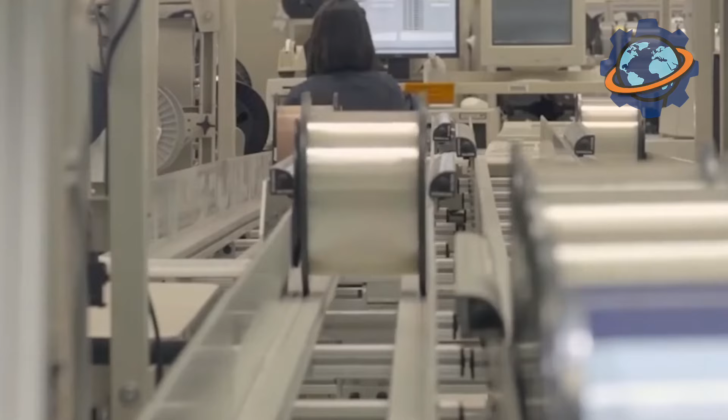After the polymer has been applied and shaped, the fiber passes through a zone of ultraviolet light. Here, the polymer instantly hardens under the influence of ultraviolet lamps. This is a process called polymerization. Anyone who gets their nails done knows how this happens. Ultraviolet lamps emit light of a specific wavelength that activates chemical reactions in the polymer. Thanks to this, the coating quickly becomes solid, while retaining its elasticity and ability to protect the fiber.

This is a very fast process. The coating solidifies in fractions of a second, literally. This method does not heat the fiber, so it doesn't damage it. This provides very strong and durable protection.

The entire machine is equipped with sensors and control systems. They constantly measure the coating thickness, fiber feed speed, and uniformity of application. If the coating layer is too thin, or there are defects, the system either stops the process or adjusts the parameters to avoid defects.

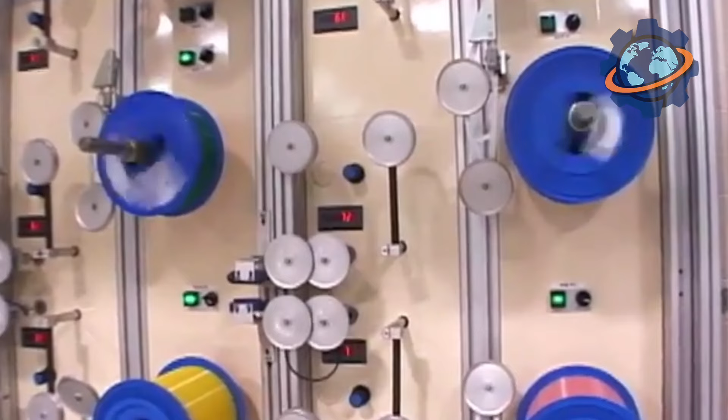At the end of all this technological magic is a spooling module, rotating with a hum resembling the sound of a jet engine, only in miniature. The fiber, like transparent silk, lies down smoothly and precisely, coil after coil. It shimmers in the light of the lamps, reflecting cold blue and white hues.

The spool moves smoothly, to the left, then to the right, with millimeter precision, as if an artist is painting pictures with movement. One wrong angle, and everything will go haywire, so the system automatically adjusts the rotation speed and fiber tension with surgical precision.

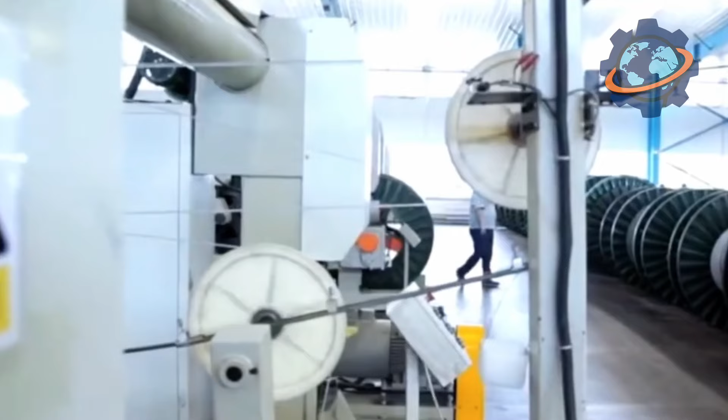Around are sensors, lasers, cameras. They carefully ensure that the fiber lies flat, doesn't twist, and doesn't create tension. With every minute, more and more layers appear on the spool. Imagine, in a few hours, there are already several kilometers of thin, almost invisible fiber there. And all this, without a single break, without a single scratch. Because even a micro crack, and the light signal will get messed up, like a radio wave in a storm.

Before cable assembly begins, the fiber from the spool is carefully wound onto a production line. Since one cable usually contains several fibers, individual threads are combined into ribbons or modules. For ribbons, the fibers are arranged parallel in a single plane, for example, 12 pieces, and glued together with a special resin. This makes them easier to work with during connection. For bundles, the fibers are twisted into a spiral strand and placed in a plastic tube.

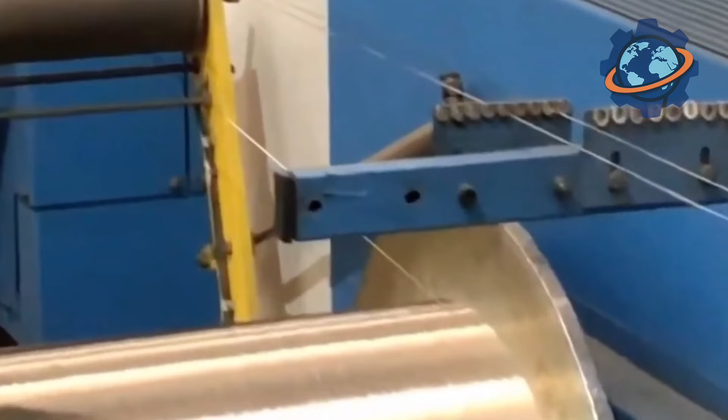These ribbons or bundles are then placed into buffer tubes, thin, flexible plastic channels that provide space for the fiber's slight movements. This is important because when the cable's temperature changes or it's bent, the fiber slightly expands or contracts, and the buffer tube helps prevent it from being damaged. A gel that repels water and absorbs vibrations can also be added inside these tubes.

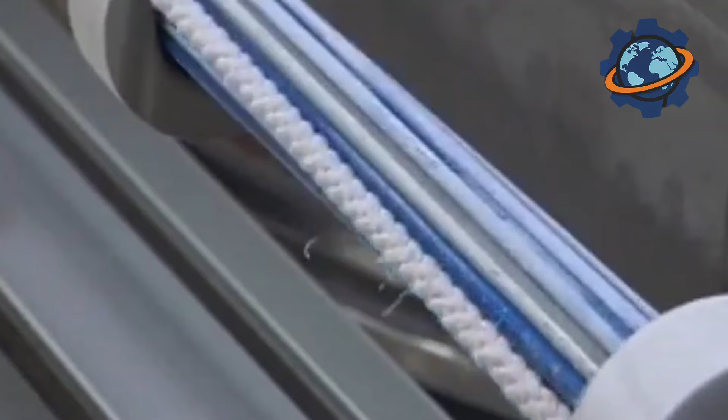Around the buffer tubes, strengthening elements are added. Fiberglass or Kevlar, very strong threads that protect the cable from stretching. Metal wire, for additional mechanical strength or grounding. A central strength member, a rigid element in the center that maintains the cable's shape. These reinforcements are needed so the cable can withstand tension, impacts, bending, and remain intact for decades.

All of this is wrapped in an outer jacket. This is a dense plastic or polyethylene pipe, resistant to ultraviolet light, moisture, rodents, and temperature fluctuations. The cable is tested. The bandwidth of each fiber is checked, as is its bending strength and resistance to moisture. Then it's wound onto large drums, marked, and technical documents are added, and it's ready for transportation and installation.